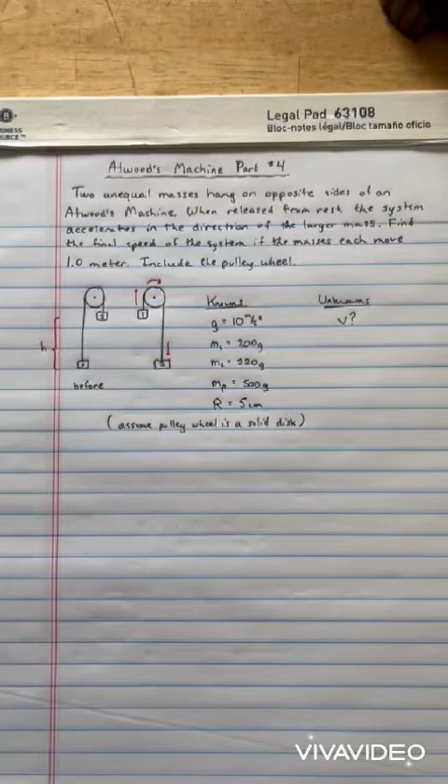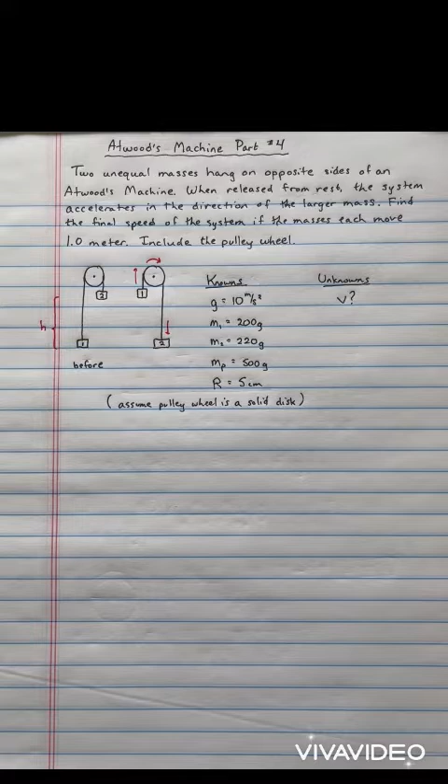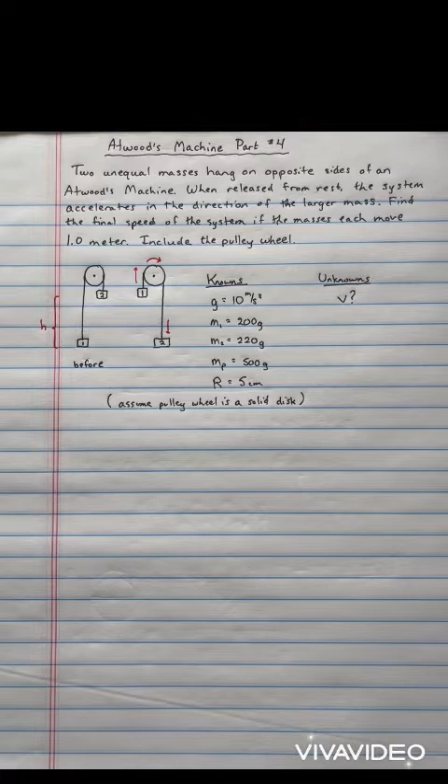Today's episode, we are going to solve one last time an Atwood's machine problem. In this case, we're solving for the speed of the masses as they drape across the Atwood's machine, incorporating the effects of the pulley wheel.

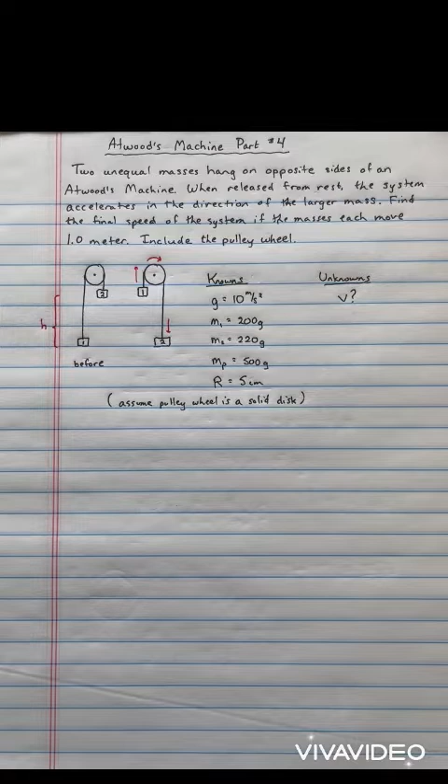So, in previous episodes, we have solved for acceleration and for speed. We've solved for acceleration both with and without the pulley wheel. We've solved for speed without the pulley wheel. Today is with the pulley wheel. And because the pulley wheel is a rotating object, we have to incorporate rotational motion to solve that problem. So, let's go ahead and get started.

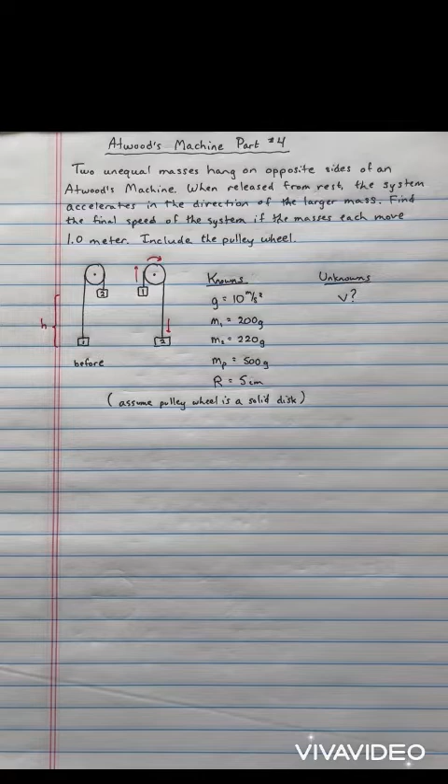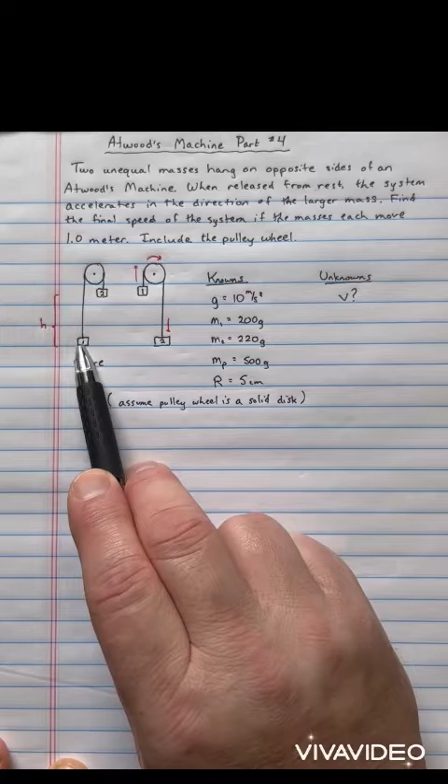So, this is an energy problem. Now, like many energy problems, they are very good at solving for speeds. And that's what our question is. Let's take a look at our situation. We have a small mass here, a large mass here, and a pulley wheel here. The small mass is a height h below the heavier mass. When the system is released, the small mass gets pulled up, the pulley wheel rotates, and the larger mass drops.

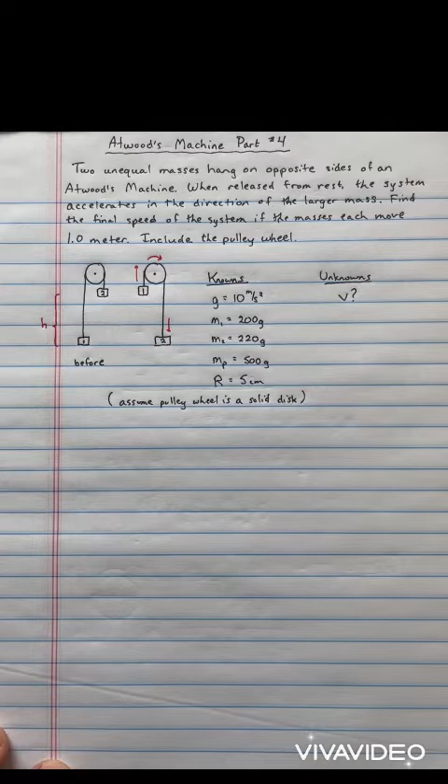We're going to assume that this distance is 1 meter. We also have various masses and the size of the disk, and of course we round off little g to 10 for demonstration purposes. The only thing we're interested in this particular problem is the speed. So, how do we solve for speed? Well, this is an energy conservation problem, so let's do energy conservation.

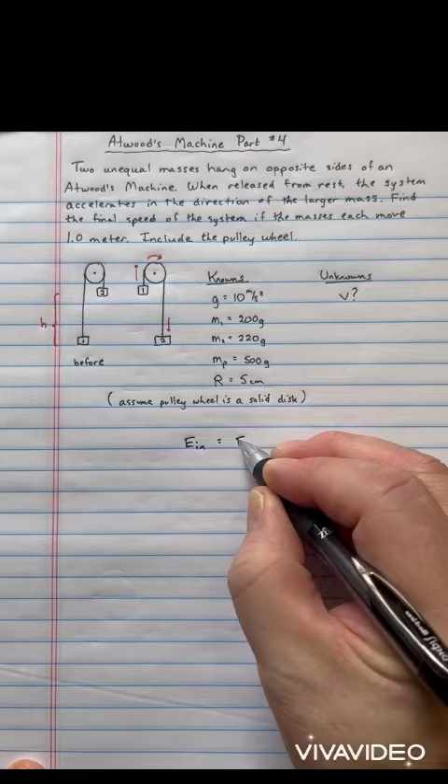Depending on how your instructor or textbook likes to write it, we could talk about the energy going into a problem equaling the total energy coming out of a problem, or if you prefer, the initial or original energy and the final energy. I'm not too worried about the specific ways to say that, except that the concepts are there, right? So, what kind of energy do we have going in? Well, at the beginning, nothing is moving. It says specifically, when released from rest, therefore, nothing's moving, therefore, no kinetic energy of any kind.

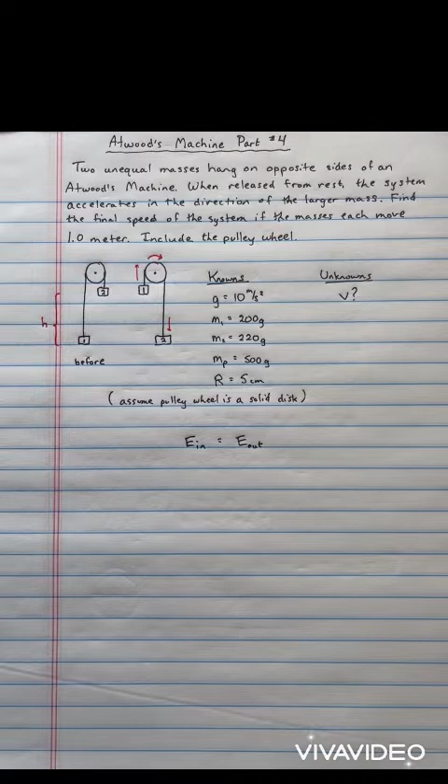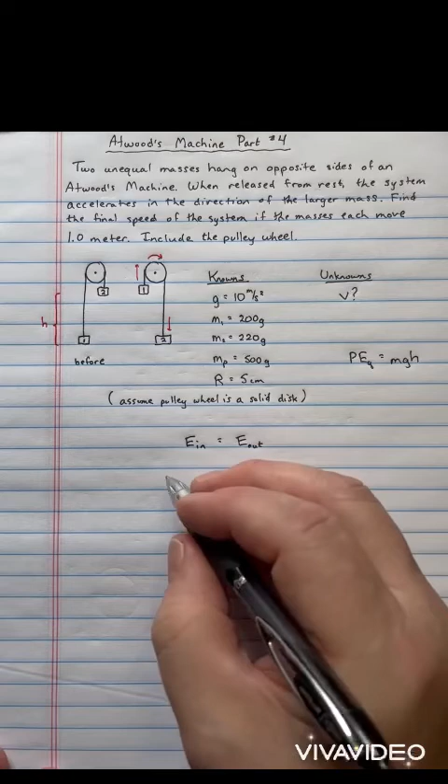The height is chosen to be 0, where mass number 1 starts, and mass number 2 is a height h above that. So, the only possible source of energy to start the problem is the gravitational potential energy of the second mass. Gravitational potential energy, let's write it over here to the side, in general terms, is mgh. So, let's put in m2gh to get started. And that's it. There are no other sources of energy for this problem at the beginning. Again, because nothing else has a height to it, nothing else has any motion.

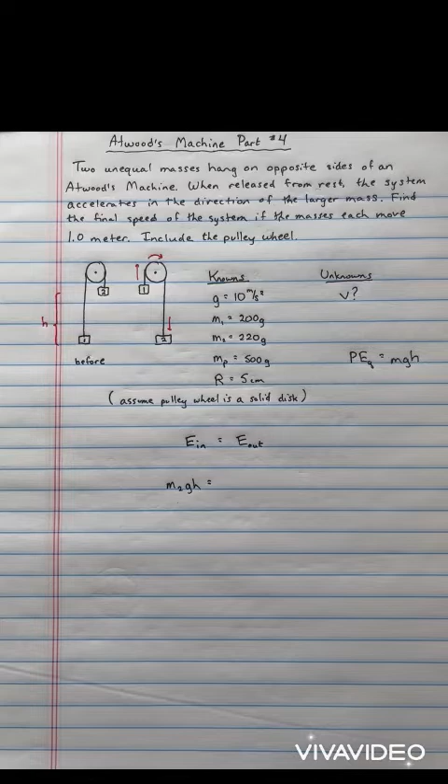Now, in case you're wondering, what about the pulley wheel? Is the pulley wheel not a height above that? Yes, but the pulley wheel doesn't move vertically, I should more specifically say. The pulley wheel rotates, but it doesn't move up or down, and therefore there's no gravitational potential to worry about for the pulley wheel's case. So, none there either.

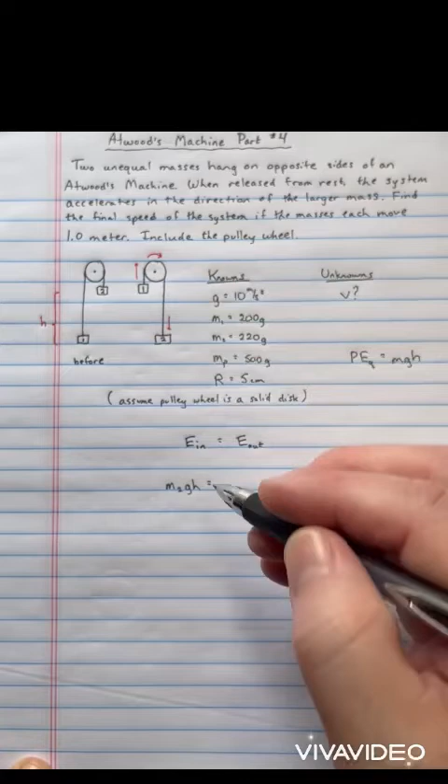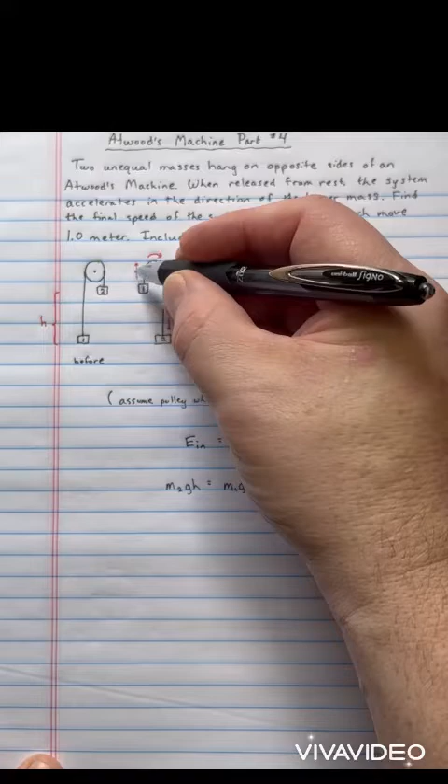All right, at the end of this problem, mass 2 has gone down to height 0, so there's no more gravity potential there, but mass 1 has been yanked upwards, so it has accumulated gravity potential, and we can illustrate it that way. Also, both masses have moved and are moving at some speed v, we'll call it, at the end of the problem. And so even though mass 2 is going down and mass 1 is going up, kinetic energy, as you recall, equals 1/2 mv squared. And since we're squaring a velocity, the direction doesn't matter anymore. So mass 1 has a kinetic energy of 1/2 m1 v squared, and mass 2 has a kinetic energy of 1/2 m2 v squared, like this.

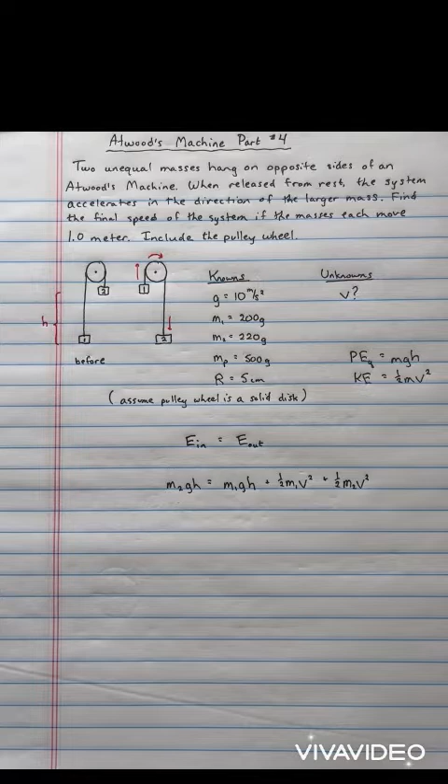Now, how do we incorporate the pulley wheel? Well, the pulley wheel rotates, and because it's a physical object with mass, that implies it also possesses a kinetic energy. What kind of kinetic energy? Rotational kinetic energy. So we're going to make a small addition here. We're going to put a subscript L on this first kinetic energy, because that is what we call linear or straight line kinetic energy. But the question we're asking about the pulley wheel is rotational kinetic energy.

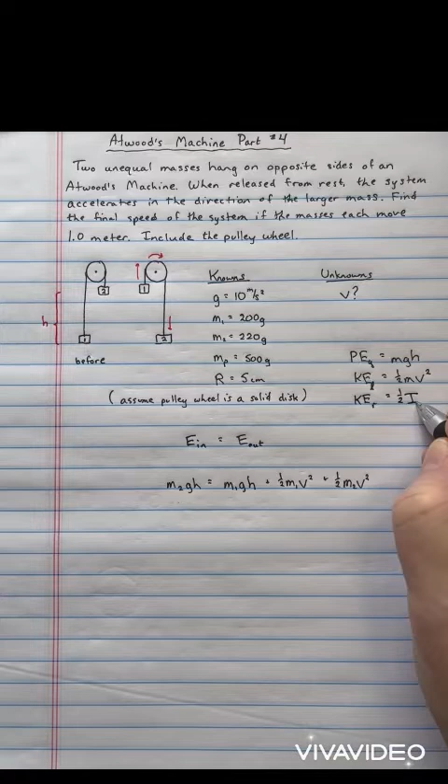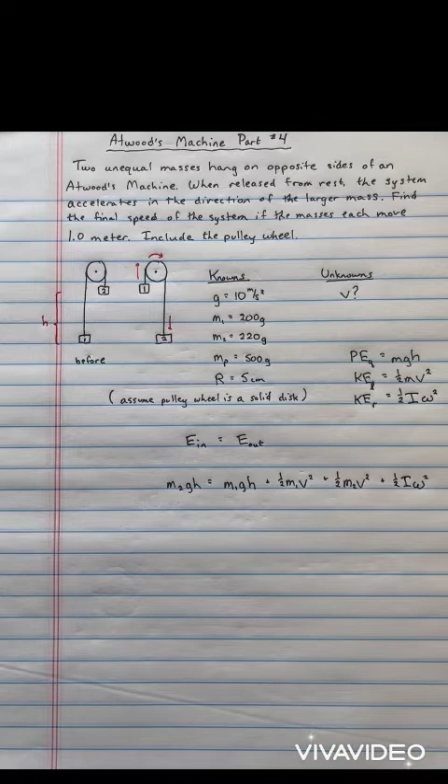That is equal to 1/2 multiplied by moment of inertia multiplied by angular or rotational velocity squared, and looks like this. So, if we want to incorporate what's happening with the pulley wheel, we need to include its rotational kinetic energy, and we simply add it here. Again, remember, energies are all scalars, which means if you want a total, you just simply add everything up, right? So, that's exactly what we've done. Now, here's the next step. What do we do with this?

Now, if you look at first glance, we have introduced, because of this term especially, a whole host of unknowns. We don't know V. We also don't know I or omega right now, so how do we incorporate that? How do we deal with that? I is moment of inertia, and the clue for dealing with that is this statement here. We're going to assume the pulley wheel is a solid disk.

If we assume the pulley wheel is a solid disk, then the formula for moment of inertia of a solid disk is 1/2 mr squared. Now, I'm going to put a subscript little letter p on that mass to make sure that we know that that's the mass of the pulley wheel and not either of the other masses. Right? So we do have to distinguish that.

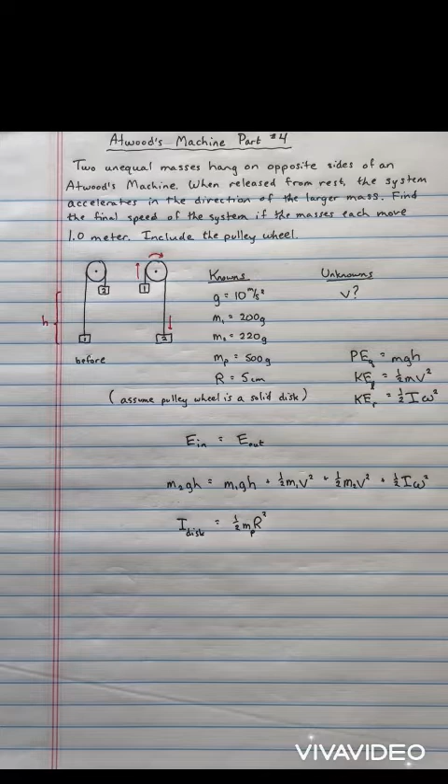R is the radius of the disk, and this is a rotation around the center of the disk, and that is exactly what's happening, right? It's rotating around its center. So, moment of inertia of a solid disk. Now, in actuality, the disk is probably not a perfect cylinder and so on and so forth, but this is a good first step. This is a first good modeling attempt at what the disk is capable of.

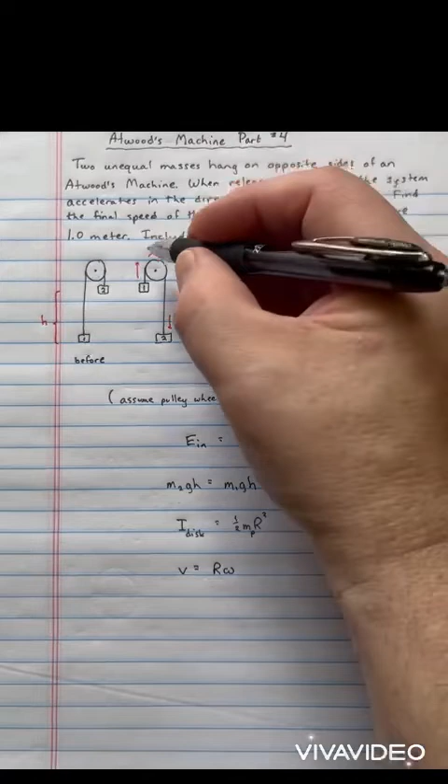Okay. What about the velocity part? Well, in terms of velocity, the linear velocity at the edge of a disk is equal to the radius of the disk multiplied by its angular velocity, which we symbolize with the little letter omega, the Greek version of the little letter W, right? Like that. And that means that this pulley wheel is rotating. That's what we're talking about. And the velocity is a point at the edge of the disk.

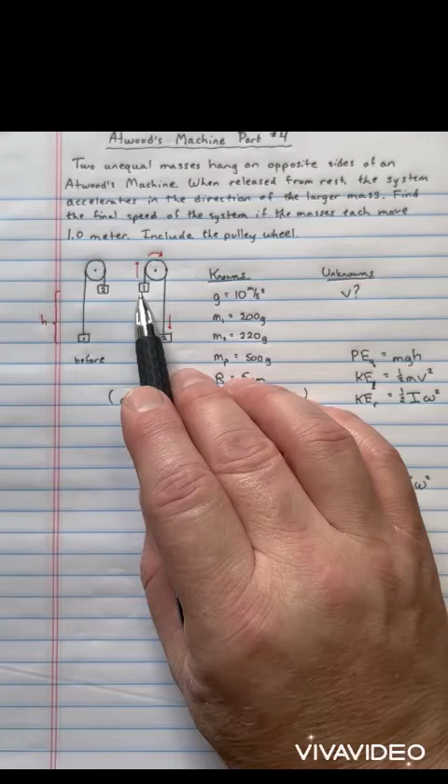Now, why do we have to worry about that? Well, the velocity or speed at the edge of the disk is the same as the velocity of the string. Again, I keep saying velocity, I mean speed. And the speed of mass 1 and the speed of mass 2. They're all connected together. So that is what we want. Now, the formula says omega squared, so we need to turn this into omega squared. So first, solve for omega. Omega is equal to V divided by capital R. And omega squared then is V squared over R squared, like that.

Let's go ahead and check out this rotational kinetic energy term by itself first. So kinetic energy of rotation is 1/2 I omega squared. But now it's 1/2 multiplied by the moment of inertia, which is 1/2 mp R squared, like that. And omega squared is V squared over R squared. Now, why are we doing this? We'll show you in a moment.

A couple things. First off, notice that this 1/2 and this 1/2 are separate 1/2s. So we can't eliminate one of those. Make sure that you've got both of those there. This 1/2 is fundamental to the formula itself. This 1/2 comes from the individual shape. In this case, we're using a solid disk. If, by the way, it was a different shape, say, a solid sphere or some other kind of shape, we'd have a different fraction here. But this is a solid disk. So don't forget, we do have two of these 1/2s to worry about.

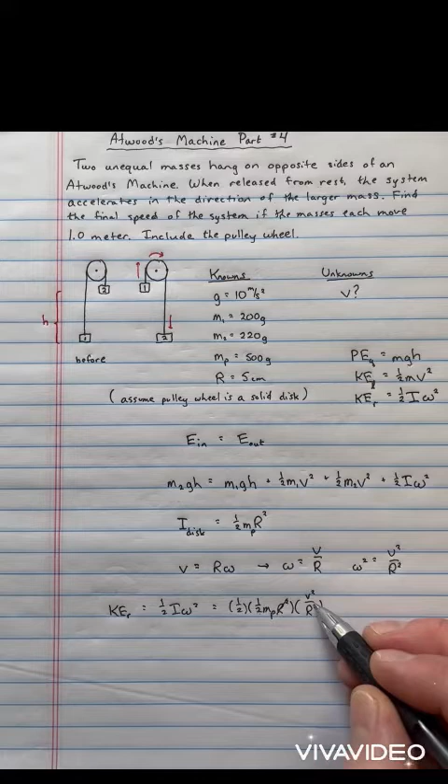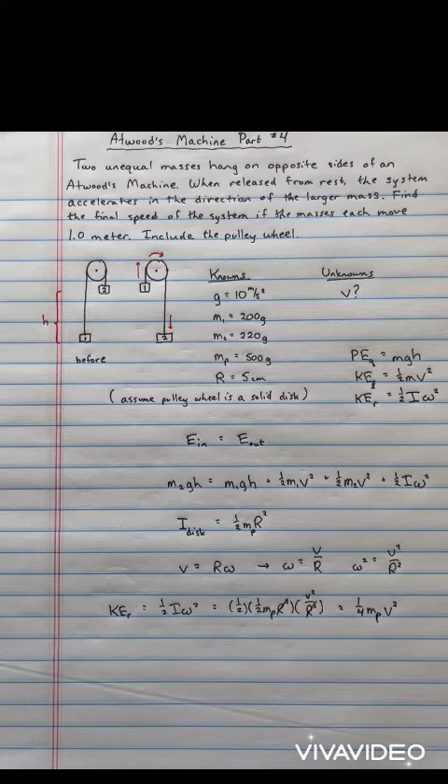Also, one of the reasons for writing it this way is that we get rid of one of the bits. So R squared here divided by R squared there, right? That cancels. So put everything together. 1/2 times 1/2 is 1/4. We have MP and a V squared. And notice what we've done. We have taken what looked like a rotational kinetic energy term and turned it into something that looks very much like a linear kinetic energy term, right? A fraction, a mass, and a linear speed squared. And that allows us to add everything together now where we couldn't do it before.

So let's take this equation and rewrite it. So M2GH equals M1GH plus 1/2 M1V squared plus 1/2 M2V squared. And now substitute 1/4 MPV squared like that.

That makes a big difference because now we can see lots of terms have the V in them. Everything else is known, right? All the masses are known. H is known, that's the 1 meter. G is known, that's our good friend, 10 meters per second squared. So everybody's known. So at this stage, it's a matter of consolidating.

So to consolidate, notice that the equal sign is over here, right? So let's subtract this term here to the other side and put all the V's together. So 1/2 M1V squared plus 1/2 M2V squared plus 1/4 MPV squared on the left, M2GH minus M1GH on the right.

At this stage, it kind of depends on how you like to consolidate things, but if you notice, everybody over here has a 1/2 V squared term in it. So let me separate that out.

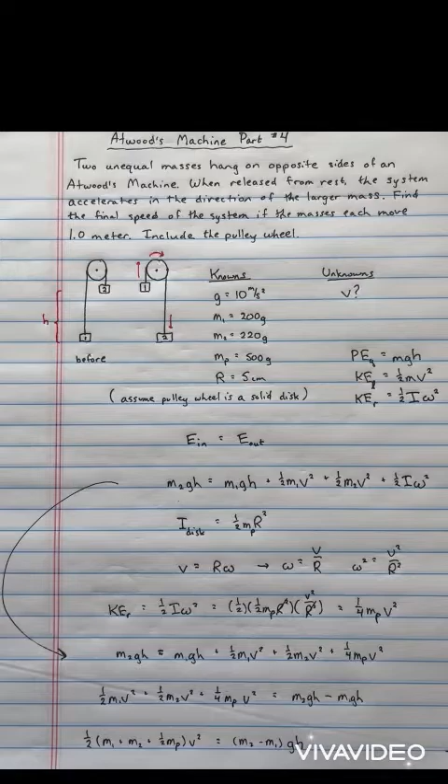So I have a 1/2. Now I'm going to write this way. You'll see why in a moment. M1 plus M2 plus 1/2 MP. Notice that 1/4, 1/2, that's how I get that. And a V squared over here equals, then consolidate on this side, M2 minus M1 GH on the right. Okay, so almost done, but let's take another page to finish this up.

Okay, so to have this out here in front of everybody one more time, we rewrite our equation so everybody can see what we're doing. Like this. All right, everybody. Now, let's move all of these things here to the right-hand side. So I need to multiply by 2, or divide by 1/2 if you prefer, to get the 1/2 over. So that will be a 2 M2 minus M1 GH there. I need to divide by this inside the parentheses. So that will be M1 plus M2 plus 1/2 MP, like that.

And that's V squared, mind you, right? I don't want V squared. Ultimately, I want V. I want speed. So take the square root. Now, you could write this with a gigantic radical symbol, or you could simply just put this in parentheses and to the 1/2 power. Same thing ultimately. And let me go ahead and separate a few things out. I've got, again, a reason for this, which I'll show in a moment. And notice everybody here has to be under the square root sign. Do it like that. Okay, so here is our algebraic solution.